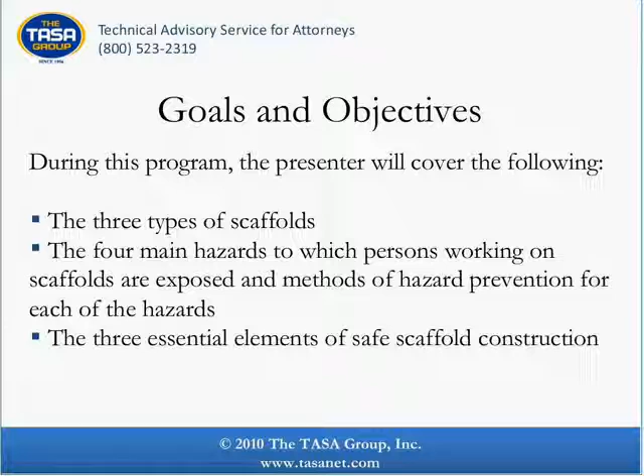During the webinar, our presenter will cover the following: the 3 types of scaffolding, the 4 main hazards to which persons working on scaffolds are exposed, methods of hazard prevention for each of the hazards, and the 3 essential elements of safe scaffold construction.

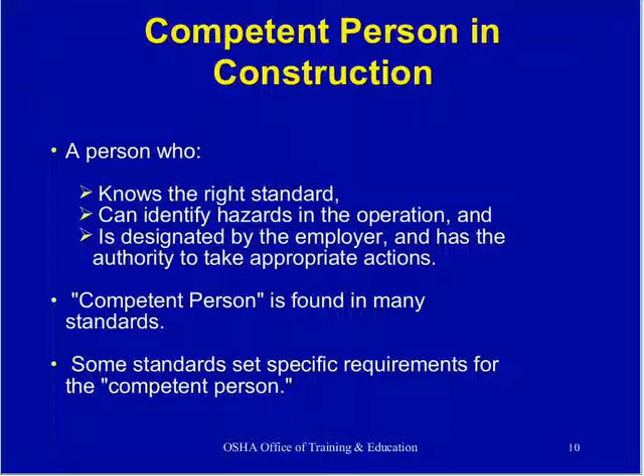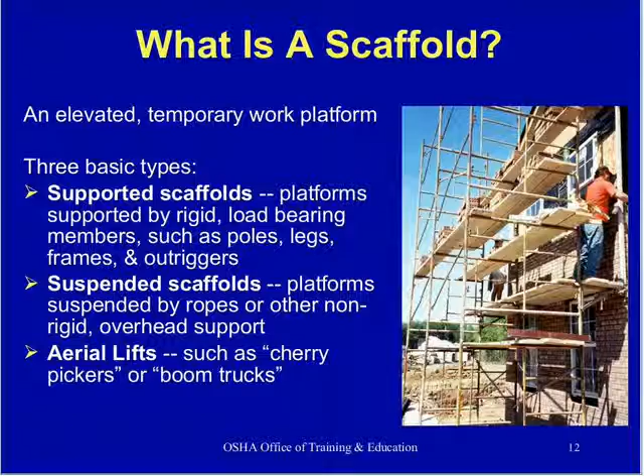Obviously falls, caused by slipping or the lack of fall protection, bad planking, that kind of thing. Naturally, scaffold collapse. Electrocution is a big one. Scaffolds are typically made out of metal, and on an existing building, for example, you might have a power line that's running into the building or near the building. So there are certain precautions that need to be taken with regards to the distance that you're working within or outside of a utility line. Struck by is a big one - they call it struck by. You're working below and somebody drops a tool above, and it can hit you and naturally cause severe injury.

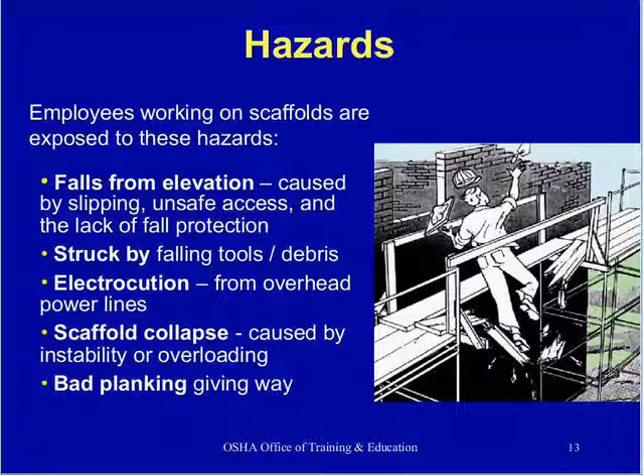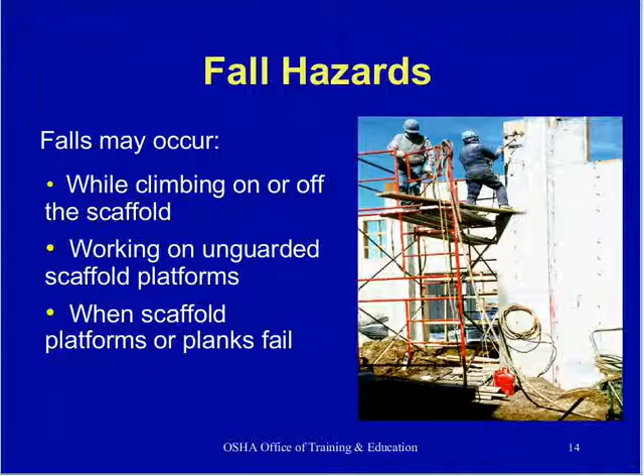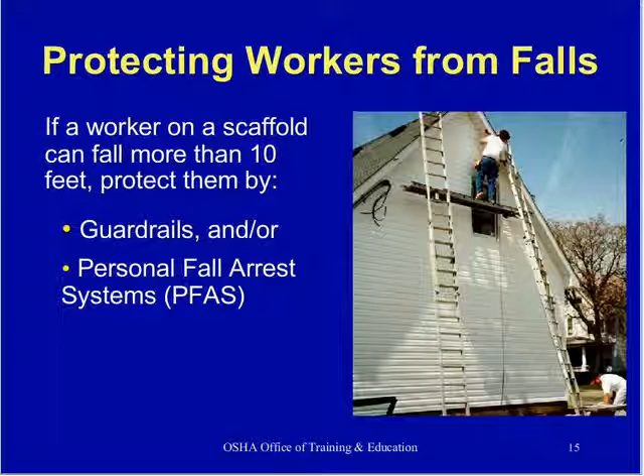Slide 15 here shows a guy on some ladder jacks painting the end of the house. He's probably a good 15, 16 feet up into the air. He can really get hurt. That is not a safe situation at all. He should either be tied off - if you're over 10 feet, then you need to have fall protection. Fall protection is either via a guardrail that has to meet certain requirements, or what they call a personal fall arrest system, which is a harness with a lanyard tied off to an anchorage point.

The toe board is meant to contain maybe a hammer or a brick or something that could be accidentally kicked by one of the workers and fall over the scaffold. So there needs to be a toe board there to prevent that from happening.

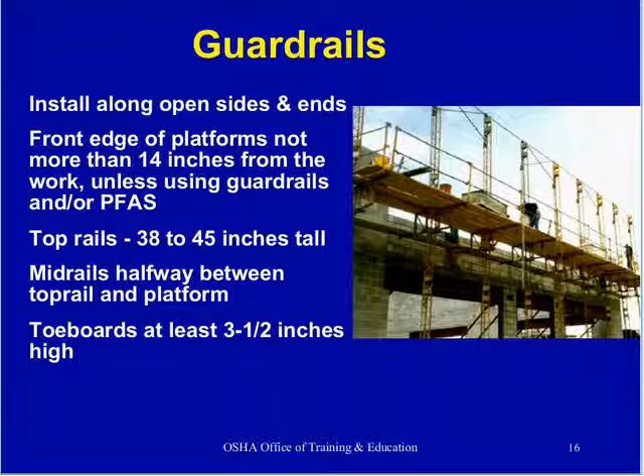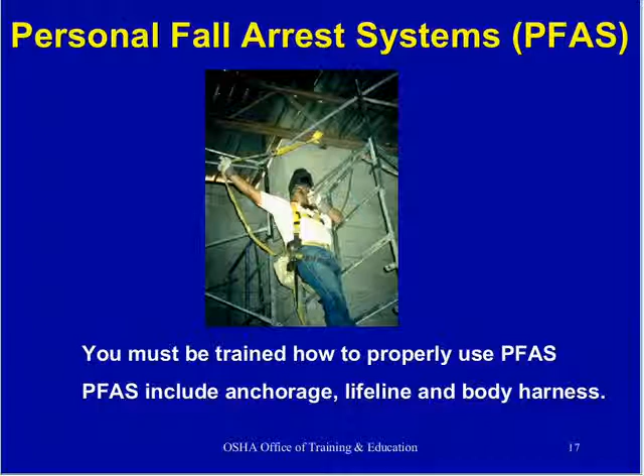Slide 17 shows a good example of a personal fall arrest system. You'll see he's in a harness. His right hand is holding a lanyard, and that is attached to the anchorage point above his head. So if anything happens, if he falls, he'll be suspended - he'll be kind of hanging there, but at least he won't come in contact with the ground. PFAS systems require training. It's basic, but people need to be trained in their proper use.

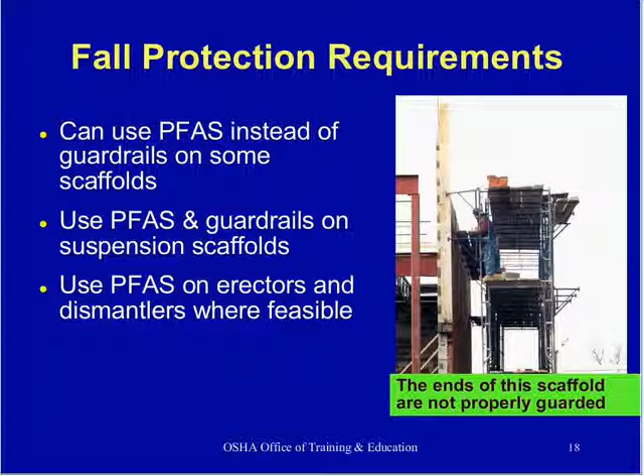Fall protection requirements are either using a personal fall arrest system, PFAS, or guardrails in lieu of PFAS. This slide shows the scaffolding. The ends, as it says underneath the photograph, are not properly guarded. There's no guardrail there, so you can walk off the end and fall and get hurt. Falling object protection is naturally a big one, which is why hard hats are required.

Barricading the area below the scaffold using panels or screens. What they mean is if they're working on a scaffold and they've got a stack of bricks that are, say, 18 inches tall, but you've only got a toe board that's 3.5 inches tall, then what they should do is put a piece of plywood in between the outer edge. It's not shown in this photograph, but in other words, a panel or screen to heighten the toe board so that it exceeds the height of the pile of bricks or whatever is placed upon the scaffold.

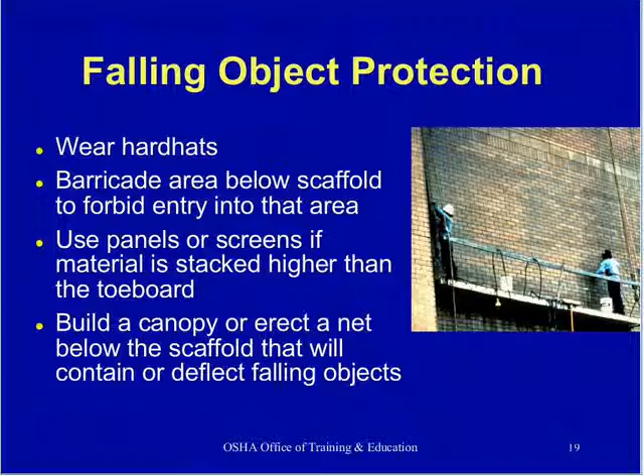If you're driving down the road, sometimes you'll see orange covers covering the power lines, and naturally those are meant as a temporary sheathing to protect people working in close proximity. I've actually called both public and private utility companies before and had them come out and place orange covers on unsheathed power lines in the past, because we were using either metal scaffolding or a crane, in order to prevent any real hazards.

Scaffold supports. On the left, that's an example of good support. It's got the base plate and the mud sill. The mud sill is meant to distribute the weight over a greater area rather than just taking that small metal base plate and setting it on the dirt where it could compress. The mud sill basically distributes the weight over a larger area and prevents that from happening.

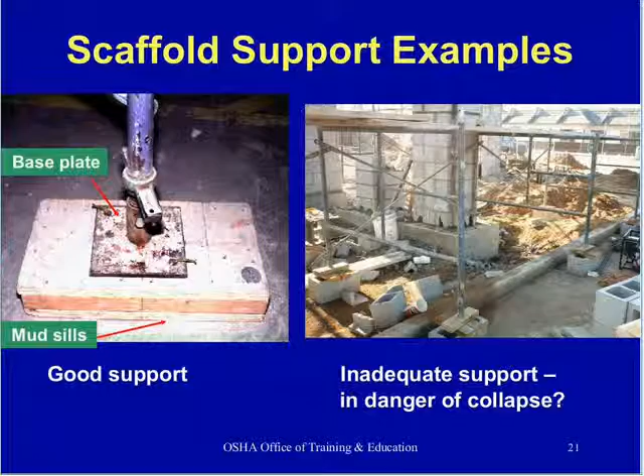Essential elements of safe scaffold construction: using appropriate scaffold construction methods, proper access via ladders. You can see in this slide, in the photograph on the left-hand side, ladders going from one level to the next. Some people, I've seen, if you see the diagonal cross bracing on each section of scaffold, will actually climb up that in order to get to the next level, and that's obviously certainly not the way to do it.

This photograph shows proper access from one level to the next. I would imagine to get to that first level elsewhere on this job site there would be a ladder. But you see there are no guardrails on any of this. Now maybe they're not done setting it up yet, but there should be guardrails on the outer perimeter of this entire setup, with toe boards, of course.

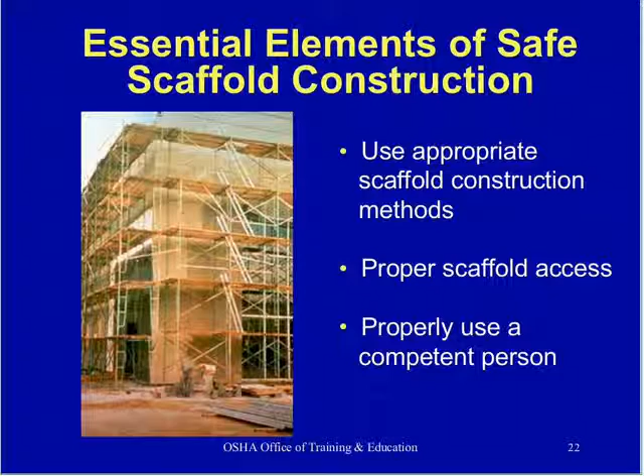Platforms must be fully planked. In the photograph on the left-hand side, the red scaffolding, there's only one plank up on the top. The entire thing needs to be planked, and the gaps cannot be more than 1 inch.

It needs to be able to support its weight times 4 times the maximum load. So if it's intended to hold 2 men, plus the weight of the scaffold itself, you add all that up, multiply by 4, and that's what the support requirements would be, and they have to be at least 18 inches wide. Now that scaffold on the right, around that chimney, there's like 1 plank on each section.

There's lots of things wrong with that picture. Each section should be fully planked, or not planked at all if it's a section you're not working on. There's no guardrails. They're probably climbing up the end frame. On the right-hand side of that scaffold, those are called end frames with horizontal members, and sometimes workers will climb up that. As mentioned earlier, that's not the right way to do it. You want a ladder properly set up, proper access to the entire scaffold, properly planked, to work safely.

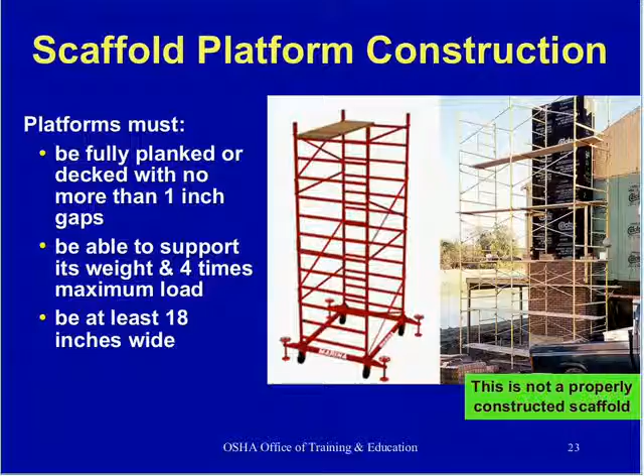Scaffold platform construction, slide 24. Obviously, no large gaps—things can fall through.

The ends of the planks must rest on separate supports and need to overlap by at least 12 inches over the supports. In the photograph on the right, you can see the planks overlapped, but the plank on the left sitting on the plank on the right doesn't reach the support. That plank needs to extend beyond the same support the other plank is sitting on. If you put a lot of weight right where two planks overlap, it can cause downward pressure at that point and cause the other end of the plank to lift up—and somebody could fall, or materials could fall and strike someone working below.

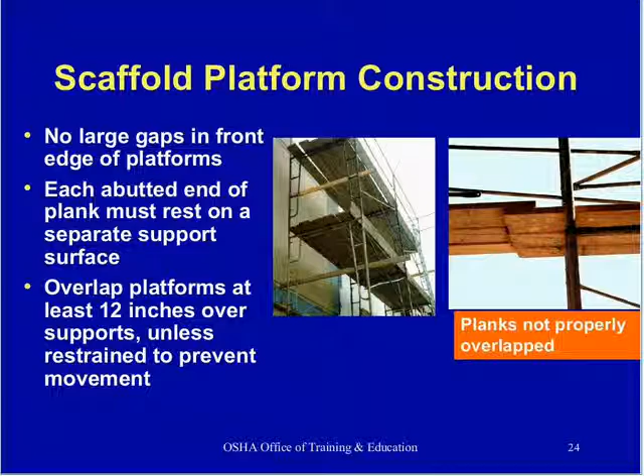Scaffold platform construction, slide 25. No paint on wood platforms. Not only can paint cause the surface to be slippery, but that's not the primary reason—the primary reason is that paint hides defects. If you have a defective plank and it's painted, you might not be able to see the defect in that wooden plank. So you're not allowed to paint wood platforms.

Scaffold grade wood—most lumber yards will sell scaffold grade planks. It's stamped, stating that it is scaffold grade. There's a stamp right on it.

Again, it needs to be fully planked, and all the pieces need to match and be of the same type. In other words, as a contractor you might have 2 or 3 different sets of scaffolds, not necessarily made by the same company. So the parts and pieces that interconnect one section to the next, or the pieces that connect the wheels at the bottom if you're using wheels—if you mix and match them and they're not meant to go together, that can potentially cause a hazardous situation.

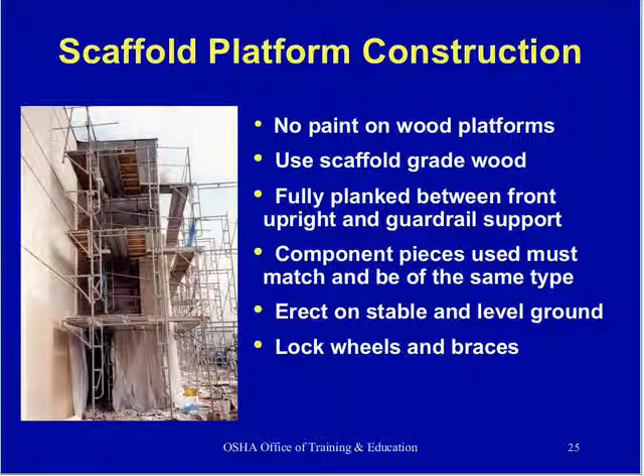But on smaller construction sites, residential or light commercial, if it's more than 4 times its width in height, then you have to use guys—a guy wire that comes out diagonally from the scaffold—ties, which tie the scaffolding to the building, or braces to stabilize it.

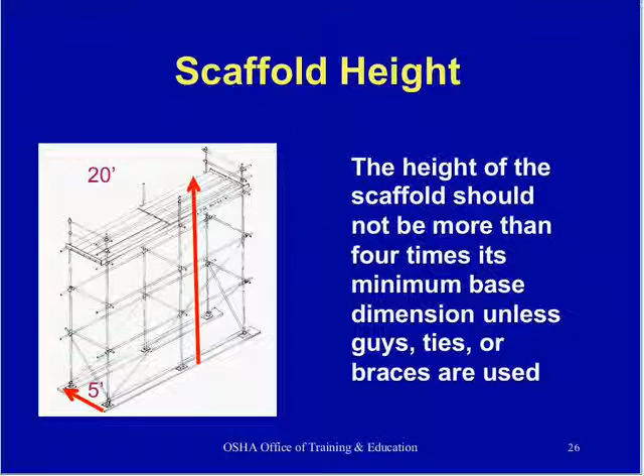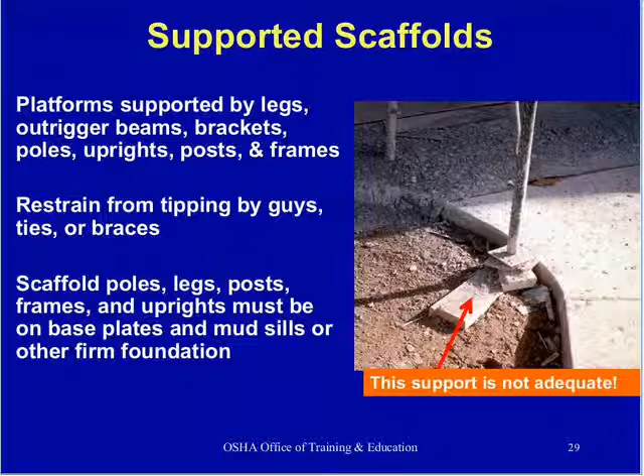So slide 30, proper scaffold access. The permissible types of access are ladders, like a portable or extension ladder, which has to meet certain OSHA regulations, not only with regards to the load it's rated for, but also how it's set up, how it's secured, the angle of the ladder, and so on.

Stairways, you see these portable stairways that are used, stair towers, ramps, walkways. You can use the building stairs and come out of a window as long as the surface you're stepping upon is within 2 feet of the sill of the window. So you're not permitted to climb out a window to access scaffolding if the scaffolding is 3 or 4 feet below the bottom of that window.

So proper scaffold access is a big one. A lot of people fall just by trying to get to the work platform, not necessarily while working upon the work platform.

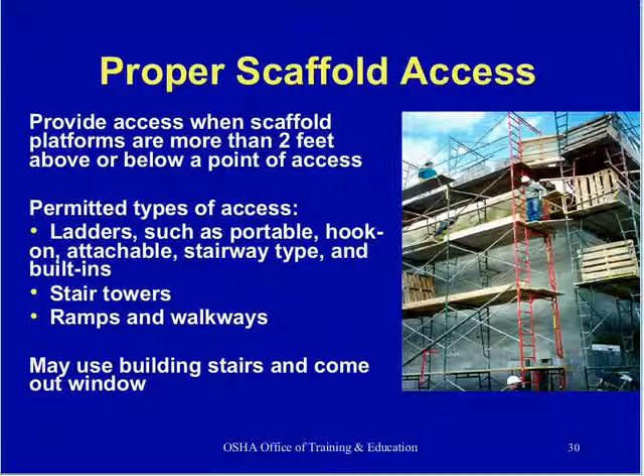Scaffold access - no access by cross braces, which I was talking about earlier. See that worker there? He's using the diagonal cross braces to climb up the scaffold, and he's climbing up onto his 4th section of scaffold, which is probably 6.5 feet high. So he's 24, 25 feet up in the air there. Not a good idea.

When using ladders, the bottom rung can't be more than 24 inches high. Naturally, for obvious reasons, because that first step, especially when coming down the ladder, if the last rung is too high up off the ground, you can miss it and fall.

You can use some end frames. That red photograph is a picture of an end frame with those horizontal pieces, and that is sometimes permissible, but only up to a certain height. You can't use an end frame to climb more than the height of that one section of scaffold. It's perpendicular, straight up and down, not like a ladder. It's a lot more dangerous.

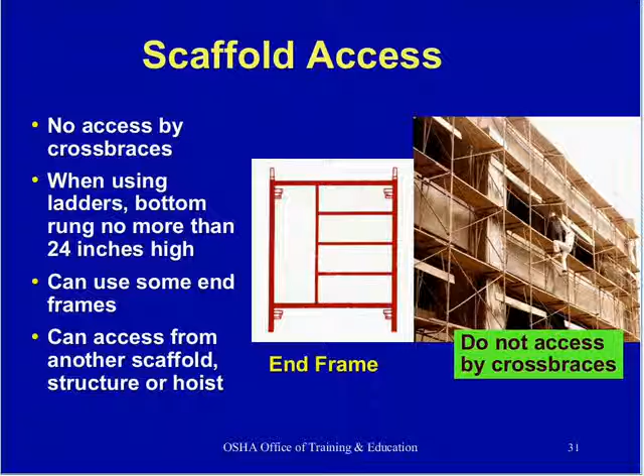All right, suspension scaffolds. These are the kind that window washers use. The photograph here is building maintenance guys.

Suspended scaffolds, you always have to be tied off, meaning using a personal fall arrest system. The reason being, if the rope or wire from which the scaffold is hanging gives way, and you're not wearing a PFAS, you're going to go down with it. If you're wearing a PFAS on a suspended scaffold, the anchorage point needs to be connected to a point other than the one the scaffold suspension ropes are fastened to.

So you're not going to tie off at the same mechanism or point that is supporting the suspended scaffold, because if it goes, you go with it. So suspended scaffolds are subjected to stricter regulations, at least in that respect, and also with respect to the load. The suspended scaffold has to be able to support 4 times its intended load. If you read the top line in this slide, 32, it says it needs to be capable of supporting 6 times the load.

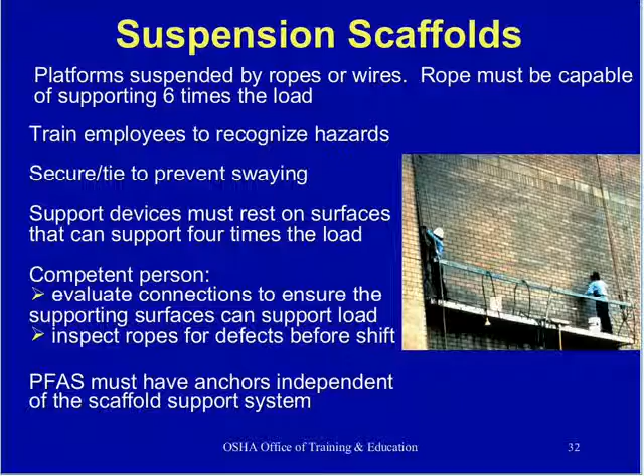Moving scaffolds, oftentimes painters and plasterers will use this type. If it's being relocated or moved, you have to do so safely. They can't be on it while it's being moved unless the surface is level, it meets a certain height to base ratio of 2 to 1, and you have outriggers. Those wheels at the end of those angled pieces at the bottom are called outriggers, and they basically expand the base width of that scaffold to make it steadier.

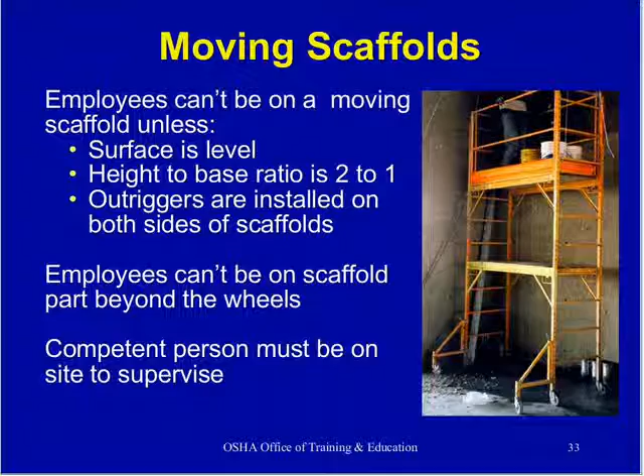Slide 34, fatal fact. This is an aerial lift, one of the 3 basic types of scaffolds. It ran over a brick, and the extrapolation of the sway of the boom caused the worker to fall 37 feet, resulting in fatality.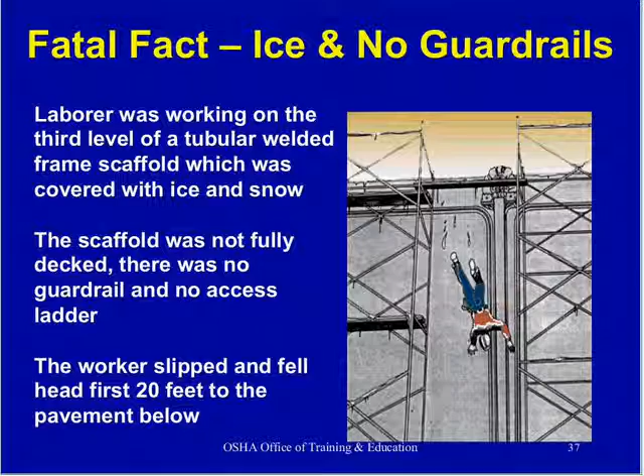Again, here we see a competent person. I'm assuming in this photograph that the competent person is not the guy underneath the plank. I'm assuming the competent person is the guy pointing his finger wearing the hard hat. But again, a person that is capable, through experience and training, of identifying hazards and correcting them. He's also one who determines if it's safe to work. He also trains workers and will select the qualified workers, for example, to set the staging up, set the scaffolding up, or take it down, as the case may be. It's probably just as hazardous taking it down as it is setting it up, if not perhaps more so.

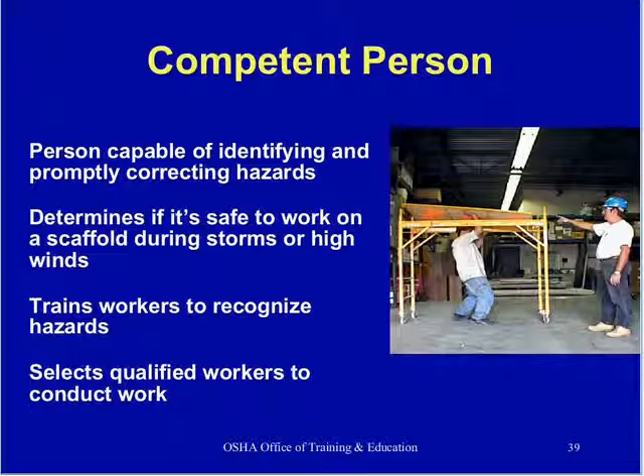Scaffolds should be inspected on a regular basis. And again, that inspection is done by a competent person, hopefully at the beginning of each shift, or at least on a regular basis. And if any parts are found to be defective, then they must be repaired immediately. In this particular photograph, we see a deformed bearer. The bearer is the horizontal portion of the scaffold that supports the plank, so it looks to me as though somebody came along and sort of fixed it temporarily, but that certainly is not a permanent solution to that problem. That should either be discarded or professionally fixed.

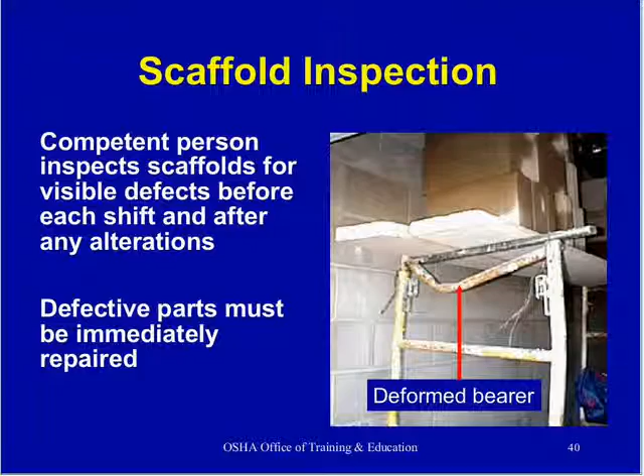Scaffold erection, slide 41. Again, competent person. Competent person is a big thing in scaffold erection.

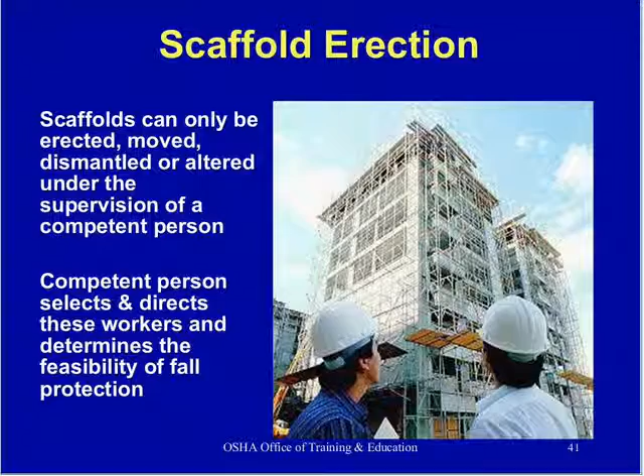Slide 42, training requirements. Training by a competent person on scaffold hazards, how to identify them, procedures to control those hazards. The training has to include the four big hazards: falling objects, electrical, proper use, and proper scaffold load.

For example, the case I have in New Jersey where the gentleman fell, the scaffold was actually made from lumber that was found on the job site. And that's fine if it's built properly. But I could tell very clearly, just by looking at the photographs, and they weren't very good photographs either - the first thing that went through my mind when I received the information on this case and started looking at the photographs was, well, no wonder it collapsed. This gentleman was killed. He was putting the window in, and the scaffolding failed. So the amount of load that a scaffold is capable of holding is obviously critical, as is training. If that gentleman were properly trained, then he may still be alive today.

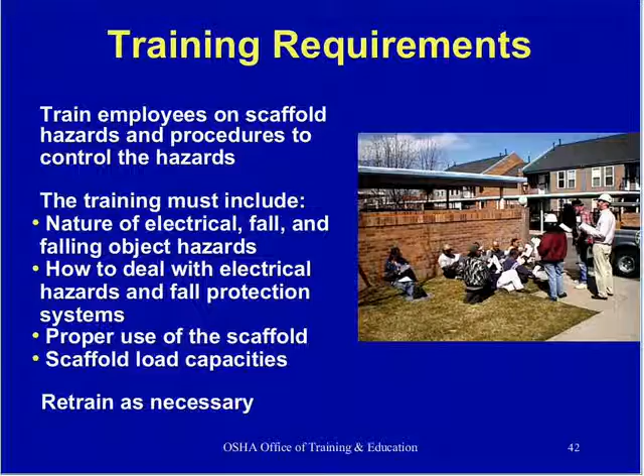These are the guys that are actually putting the scaffolding up, and they have to be trained in the erection, disassembling, moving, et cetera, and the inspection of a scaffold as they're erecting it, be able to recognize hazards and the proper procedures to use to correct them.

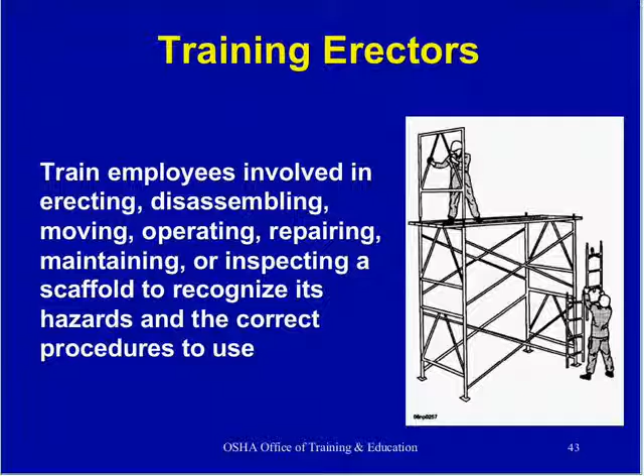Again, avoiding the main hazards of scaffolds: falling, bad planks, collapse because it's not been set up to support the load that is placed upon it, getting hit by falling objects, and electrocution.

I have a case in New Hampshire. A gentleman was working on a metal building too close to the power lines, and he was holding one end of a very long piece of sheet metal roofing. A gust of wind came along, and he kept his hands on the metal roofing, and the other end blew into an unsheathed power line. He was electrocuted. It came in his left arm and out his right arm, and literally blew his right forearm off.

And it happens so quickly. You don't want to get near electricity, trust me.

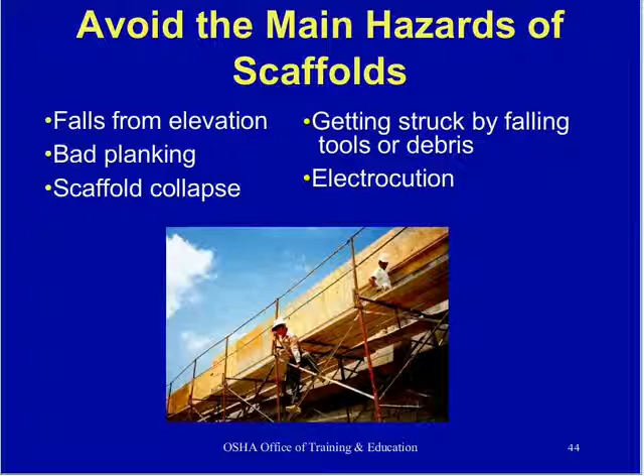So that's about it. Summarization: proper scaffold construction methods, proper access to the scaffold, and the use of a competent person, not only in the erection but also in the use of and relocation of scaffolding, training employees, inspecting it, and so on.

And I think that's it, Matt.

Slide 45. Great, David, and I think it worked out very well. I was able to follow along just fine. Thank you for your cues, and I think it was a great presentation.

We do have a couple of questions in the queue, and I'll start with the question submitted by Stephen, who had his first question answered but submitted a second one: who is supposed to inspect scaffolds before they are dismantled?

Inspect the scaffolds before they're dismantled? Yes. That is a good question.

It would depend on the height of the scaffold. As I said earlier, I'll have to check this, and I'll make a note of this question. If I have to find the answer and get back to you, Matt, then you can certainly forward my answer to Stephen.

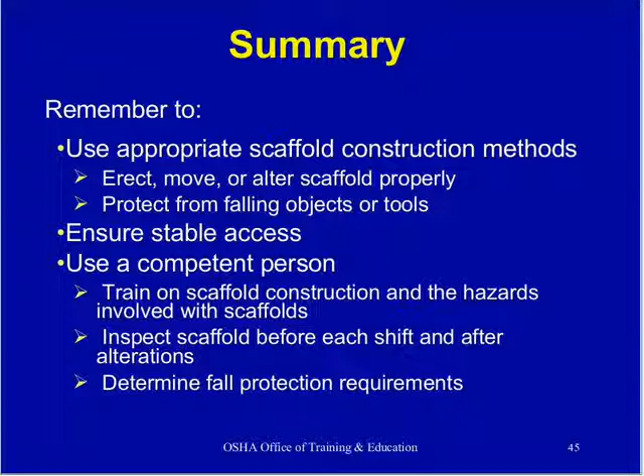I'm assuming that's what she means, what you mean. Or yeah, I'm asking her for clarification at this point.

While we get clarification, we do have a question from Steve, who asks: if a drywaller is on scaffold over an open stairwell, does OSHA require a cover over the hole? If so, who is responsible for installing the cover, i.e. the drywaller, the general contractor, the carpenter sub, etc.?